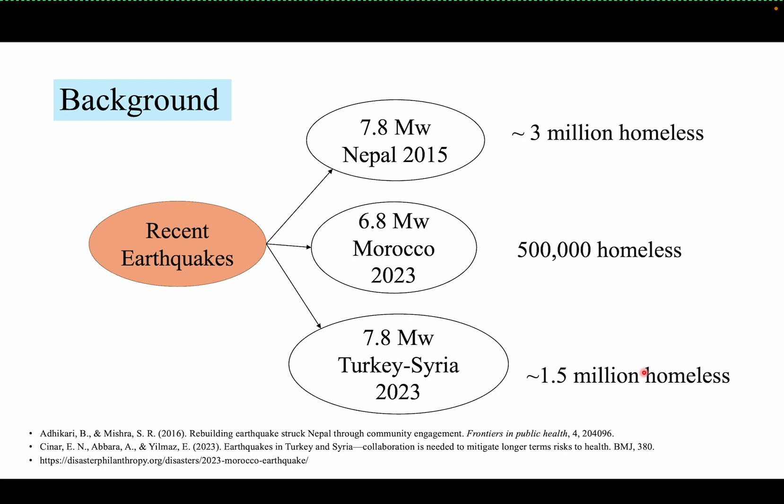So as you have noticed, from the 2015 Nepal earthquake, 2023 Morocco and Turkey-Syria earthquakes, it is reported that millions of people have become homeless after the earthquake, and it is mainly because of two reasons. One is, of course, their buildings are heavily damaged or collapsed, so they cannot utilize them further. The next case is they have their building standing, but they don't know the damaged condition of the building structures. So people are forced to live outside the buildings in a temporary shelter for some days or even a month.

Generally, the visual inspection method is carried out in order to assess the damage to the building structures after the earthquake. However, this method is a time consuming method, as we can evidence from past earthquakes, such as the 2015 Nepal earthquake and 2017 Mexico earthquake. It took a large amount of time to collect the damage condition of the building structures, and that will eventually delay the decision making.

Next is we need to mobilize a large number of experts to the sites immediately after the earthquake for damage assessment. However, we may lack the experts to be mobilized to the sites after the earthquake. The next one is these methods sometimes contain uncertainties or missing details. For example, the CTV building in New Zealand was inspected several times after the 2011 earthquakes and declared safe. However, soon it collapsed and 115 people died.

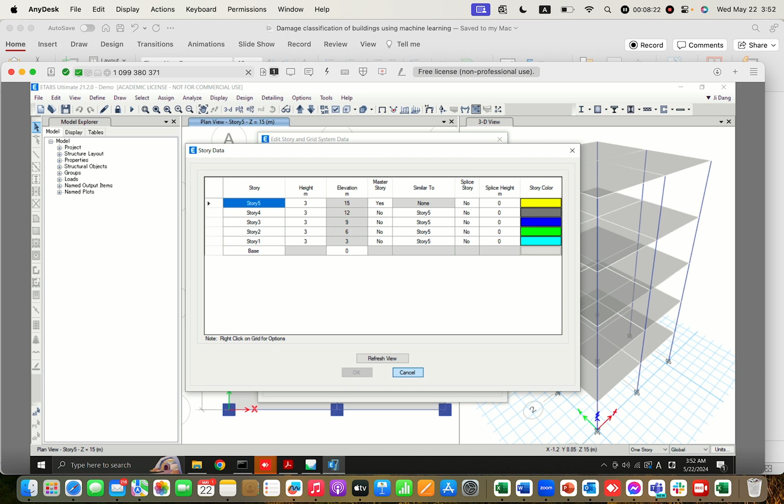So for that, I have developed a very simple building structure. We can see that it is a 5-story building, and I have given the height for each story as 3 meters, so the total building height is around 15 meters. After that, I have also defined the material properties as Fe 500 for the steel and M30 for the concrete.

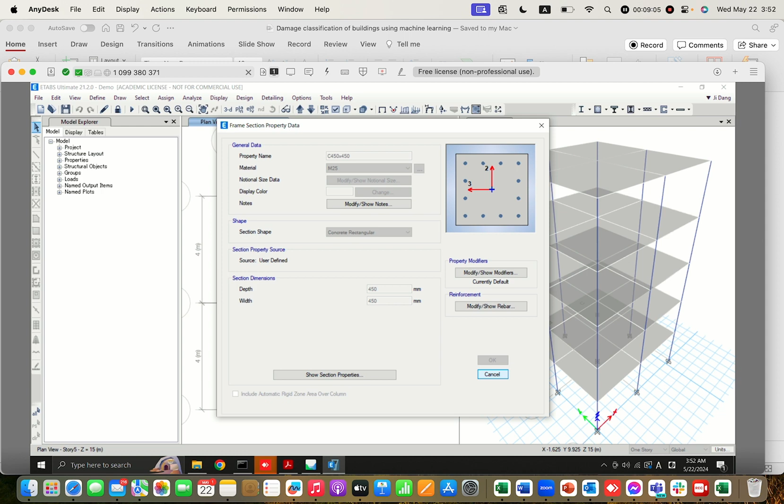Then I've also defined the section properties, for example, the frame sections. For the beam, I'm using 350 by 350 mm cross sections, and for the column, 450 by 450 mm cross sections. Similarly, I have also defined the slab sections as 150 mm, right?

Okay. So after that, I think maybe some of you are already familiar with the ETABS software. We can define many load cases and load combinations, for example, wind load, earthquake load, dead load, live load, and so on. Here what I'm trying to do is use the time history analysis functions in ETABS, then extract the results after the time history analysis, and then use those data to train our machine learning models.

So what we do is first we go to Define, then Function, then Response Spectrum. This means you can set your target response spectrum, and we have our time history record, and then we can match the response spectrum and our time history record, and then utilize those for the time history analysis. For that you can choose the different codes that you are following in order to develop your models.

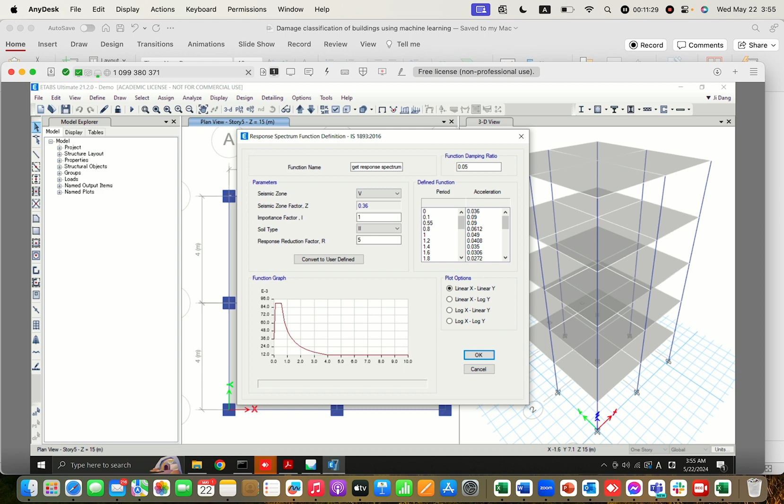So here basically we designed for seismic zone V, which is the most prone to earthquakes, right? And these are the inbuilt values defined by the code, for example, seismic zone factor 0.36, importance factor, soil type, reduction factor, and so on, and a damping ratio of 0.05. So we define this as the target response spectrum and click on OK.

Then the next part is the time history: we go to Define, Functions, and Time History. From here we have the option of how to choose your function. You can use your saved time history record. So for that we go to From File, Add New Function.

So there are a couple of options. For example, one, if you have your records, you can save them on your computer and upload them here. If not, ETABS has the El Centro record inside the ETABS software. For example, we go to browse, then if we go to the time history function here, ETABS also has multiple recordings, including El Centro.

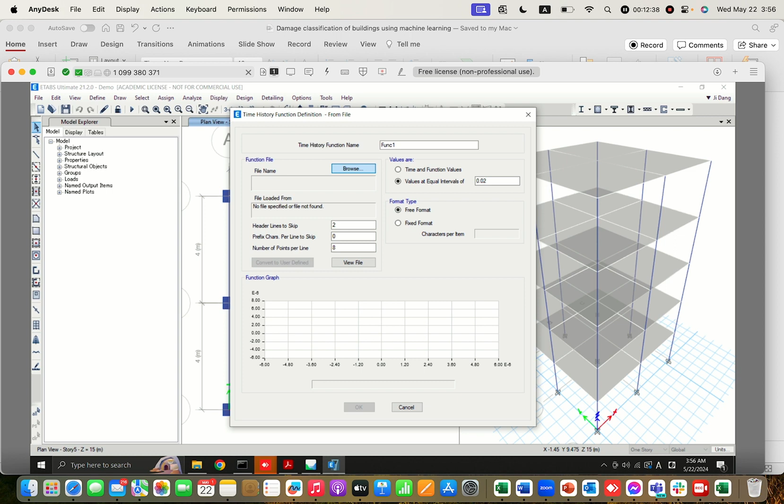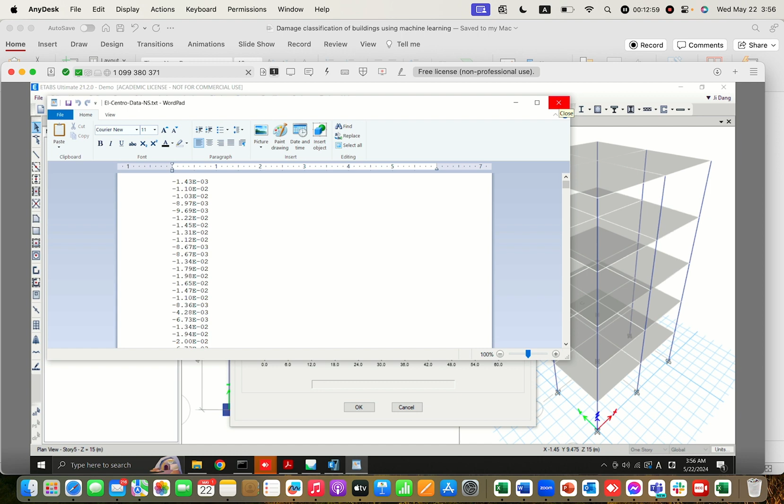But I'm trying to use the same El Centro record in both directions, in the X direction and the Y direction. So I have the recording here and I have downloaded it to my computer. So I will first select El Centro data, NS direction. This is the wave in the NS direction. You can see the files from here. This is generally a txt file, right? And then they have the recordings, and I just save it at an interval of 0.02.

So this is the value interval of 0.02. Then we don't have any headers in the file, and the data per line is only one. So this is our El Centro data in the NS direction. We click on OK. We can see our file here, and we again do the similar procedure for the EW direction, again with the same 0.02 equal interval. We click on OK.

So now we have defined our accelerations and time data, taking as reference the El Centro earthquake data in the NS and EW directions. After that we need to match our defined target response spectrum and the time history analysis data. For that we again go to define, function, and time history. Then from here we select the match to response spectrum option and click on add new function. After that we give it a name, for example, time history analysis.

Okay, and they have options for whether you want to do matching in the frequency domain or the time domain. This time I'm selecting matching in the time domain, and then we need to give the target response spectrum, which we defined before, and the reference acceleration time history. For this one let's select the NS. Let's give it as Y, with the name THAY. Okay.

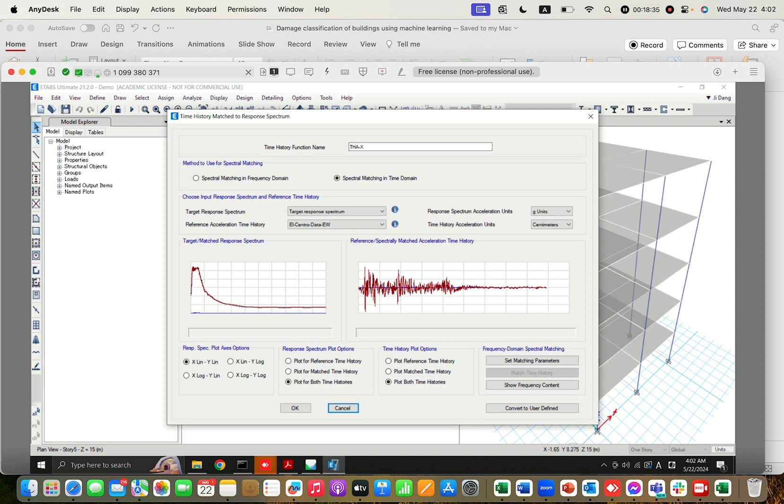Okay, so now we can see that it's matching in the x direction also, like match with our design spectrum. We click on OK. Sometimes the matching is not done, or if there is a huge variation, then we can also scale up, and then we can somehow match with our design spectrum. So we now have it in the x direction and y direction.

We click on OK. Then after that we need to define this as a load case, so we go to define load cases. From here, add new case. So we give the name as time history analysis, and for the load case type we select time history, and whether you want to do a linear or non-linear model. I select the non-linear model this time.

Then we will add the function or the load here. For example, the load pattern is accelerations in the u1 direction, and we select our response spectrum match. For example, this is in the x direction, and the scale factor basically means that in the code they have given that the scale factor is generally calculated by the formula I multiply by g, divided by r, which means I is the importance factor, g is the acceleration due to gravity, and r is the response reduction factor.

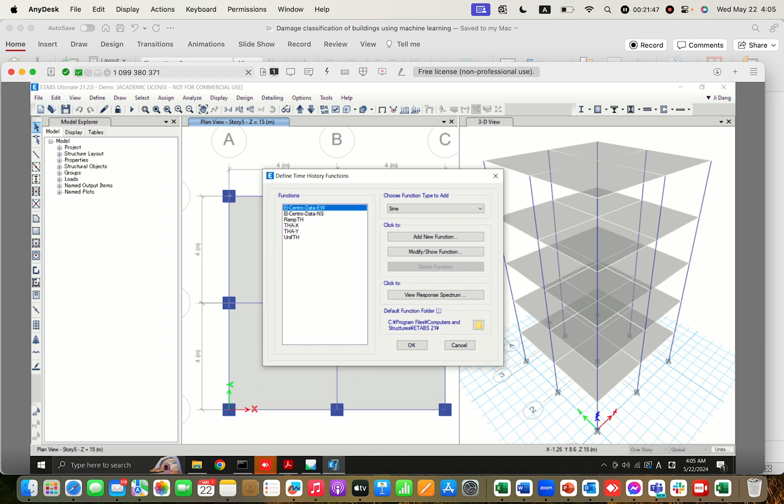For example, if we see the functions, time history, go to the EW, Modify/Show Function, we can see that it's around almost 54 seconds. So we can assign the same here, load case, go and modify. So if it's 54, then we divide by 0.1, then it's 540, and then we click on OK.

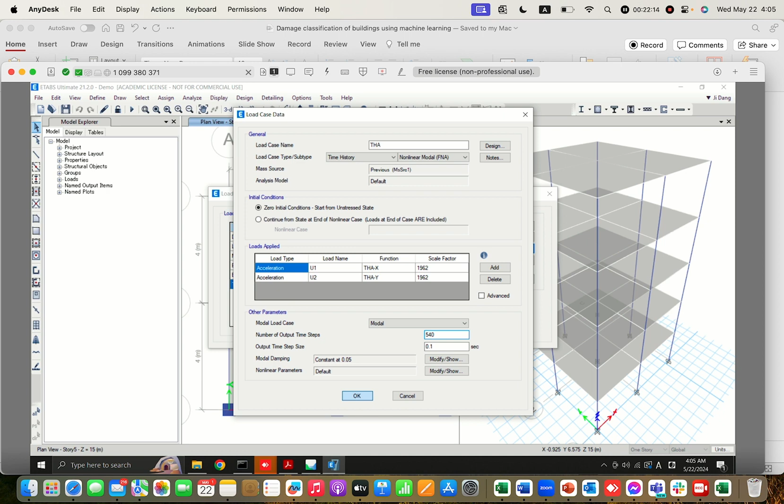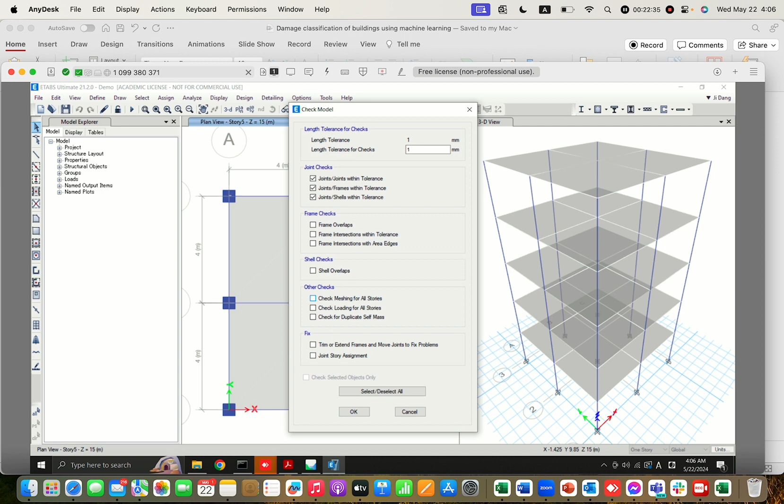So we define the time history case, including both x and y directions. Click on OK. Then after that we'll do analysis, so for that we go to analyze. Initially we will check our model for whether there's any discontinuity in the connections or something. We click on OK, then it will analyze, and if there's some warning it will give us a message, and we need to check our model accordingly. But now the model has been checked and no warning message was generated.

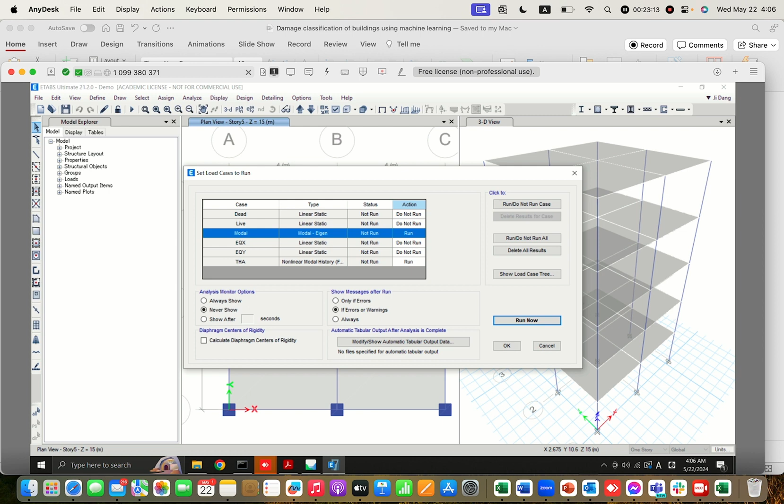So then after that we go to set load cases to run. I will select all the other cases as do not run, so dead load as do not run, live load do not run. So we only consider the modal and the time history analysis as run. Then I go to run now.

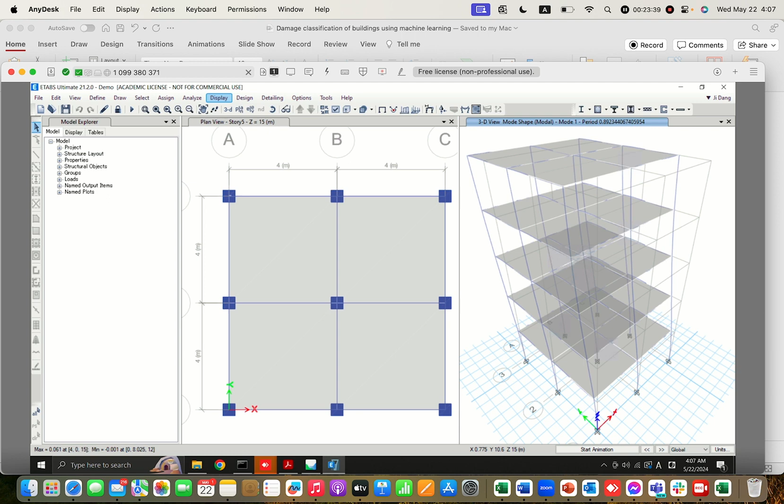Yeah, so now the analysis has been completed. If you want to see the animation, you can do the start animation. But I will go to display and show story response plot. So from here you can see the response of the building structure in this earthquake. So this is the modal case. You can see the display type, maximum story displacement, and the case is modal, but I'll select time history analysis here. So it's showing 0 for all the time steps.

So if I select maximum and minimum, you can see that this is the maximum story displacement. Blue means in the global x direction, and red means in the global y direction.

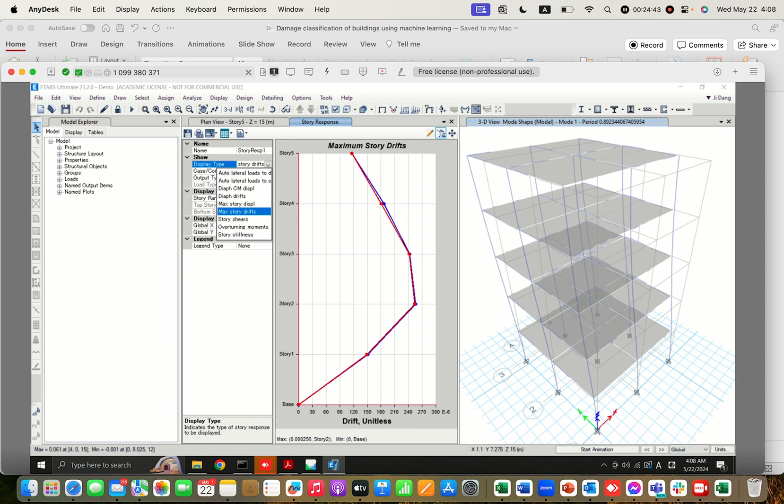So after you have the maximum story displacement from here, you can also check the maximum story drift for the building structure. You can get the maximum value from here, 0.000256, and you can check the limits corresponding to your threshold value defined in the building codes and standards, and then classify your building structures. For example, you can take the maximum story drift or maximum story displacement. After you have the results from here, let's go back to our slide.

Then you can figure out the interstory drift. The first case is the same as the story displacement. For the second case, d2 minus d1, and so on, we go to the upper floor. Then you can simply calculate the interstory drift ratios by dividing by its story height, and you can get the maximum interstory drift ratios.

So having these values, you can define the different damage cases into different categories. For example, in my previous study, I classified into 5 different categories from no damage to collapse. But for this lecture, I'm trying to use only 3 damage categories, considering the first two as safe or slight damage, and the heavy damage considered as limited entry. Only the limited entry, and then the last 2 cases, very heavy and collapse, considered as the unsafe damage categories.